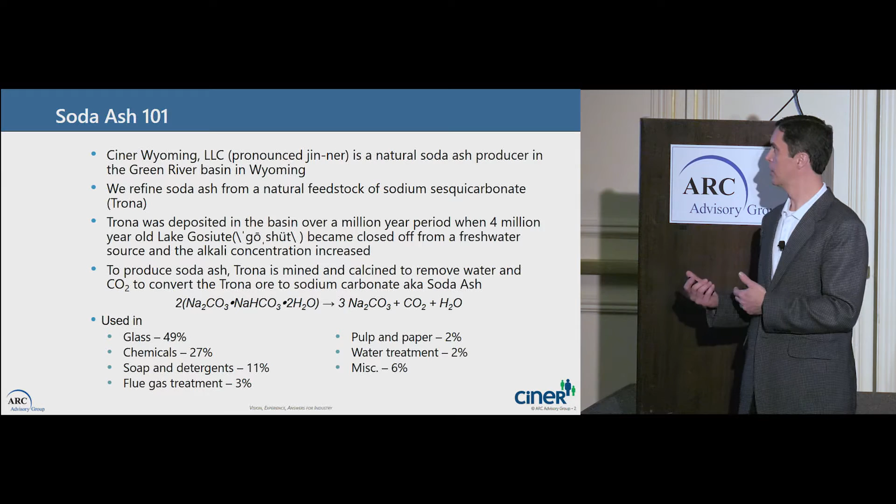There was a lake. There was some volcanic activity that put a lot of sodium in the area. There was some natural carbon decay, and over time the lake evaporated, and so the largest basin of trona in the world is right here in Green River, Wyoming. Us and 3 of our competitors produce about 20% of the world's soda ash production based out of Green River. It's mined, it's calcined, we liquefy it, we remove impurities, we convert it to Na2CO3, which is soda ash, and that's put on rail cars and we ship it around the world.

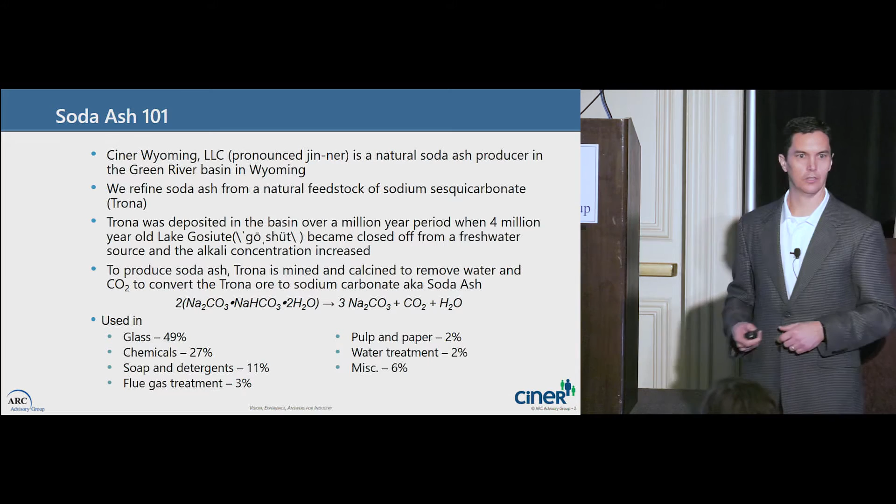As far as uses of it, about half of it goes into glass, chemicals, soaps and detergents, so baking soda, Arm & Hammer, things of that nature. So that's how it's used.

So let me tell you a little more about our journey. We started last spring, really, and Jolene's our smart plant lead, and she was using some OSIsoft plant intelligence and starting to get some interest in the company of what we could do with this historical data. And we learned a lot. My first expectation was we could use this data to predict maintenance on our equipment and try to reduce unplanned downtime. That's certainly a value, but as we looked at it, we saw lots of other areas that we could drive value from the smart plant, including process optimization.

Being at a mine, safety is a major concern, so mapping safety data onto our plant to provide visibility of that information, environmental data collection, quality. There were lots of different things, dashboards and executive dashboards. So we came up with 5 areas last spring that we wanted to prove out that we could deliver value. And over the course of a couple months, we started demonstrating that there was value here, and it was theoretical value at that point.

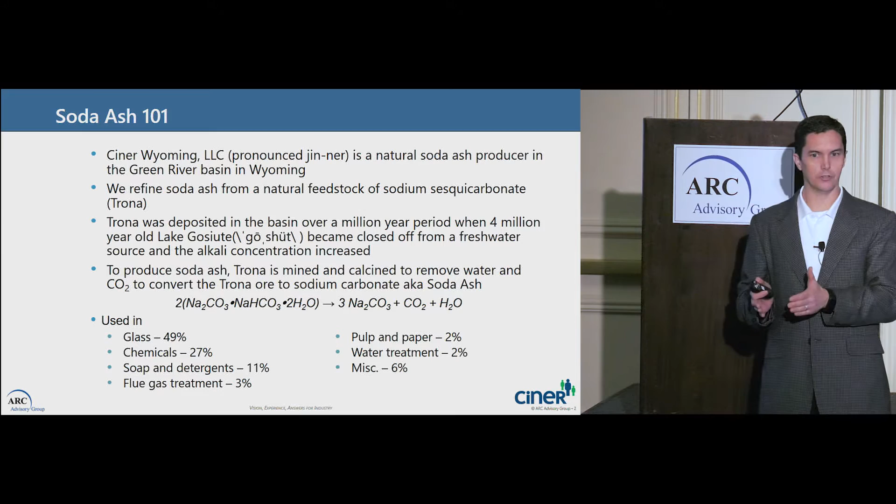So we come into last fall, about the October timeframe, and we said we want to get deeper into both the process optimization and the predictive maintenance, and we need to bring in some partners to help us with decision science and machine learning. So we placed 2 small bets on those.

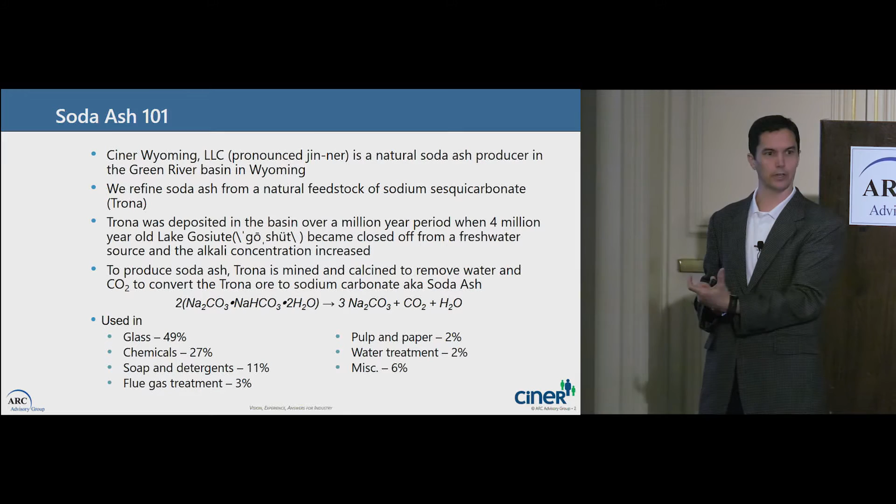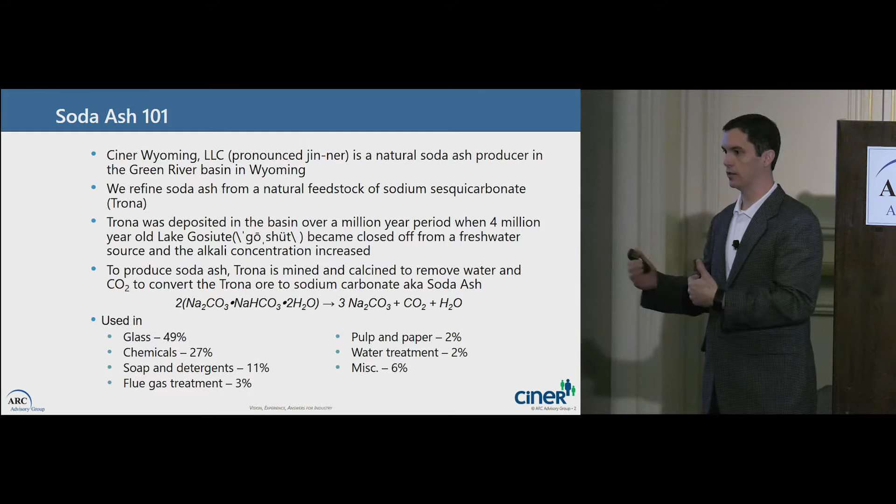One was with partners Microsoft and OSIsoft and a third-party data scientist company, and we were going to pair them with a continuous improvement group in our company that was doing a design of experiments on one particular part of our plant, and figure out, with data, could we learn more about that process than we were doing just with our design of experiments, which is taking a lot of time and a lot of effort.

The second bet was with the company Falkonry, and Jolene's going to talk about that more in detail, using the decision science built into the software where we could tie our operators more tightly to the pattern recognition and the decision science, and we got to a much faster result with that one.

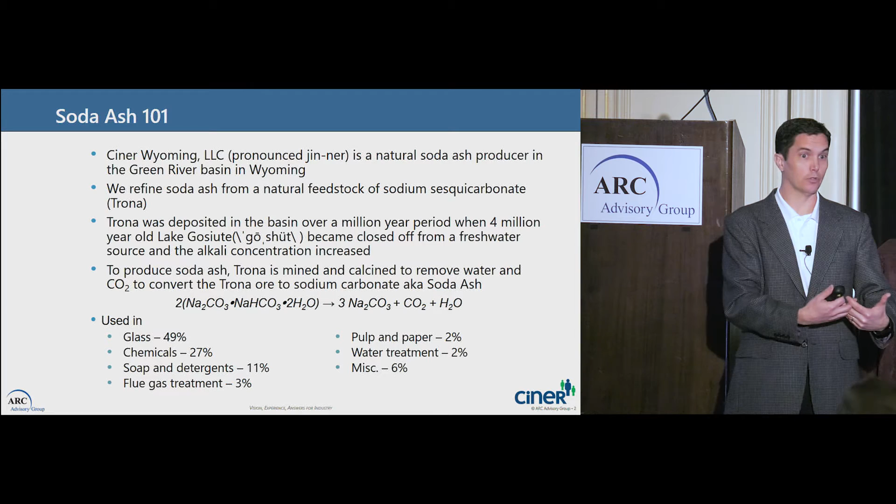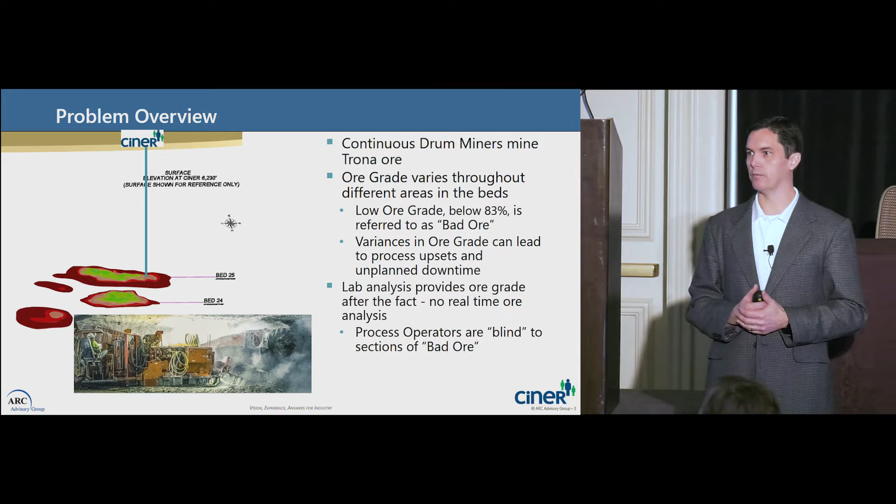So let me give you a bit of the problem overview. So we mine trona about 850 to 900 feet below the ground. We have these continuous miners, electric powered vehicles down in the mine that are constantly chewing up the trona ore, putting that on belts, sending it miles underground, up a hoist, and then we start it down a refining process.

One of the challenges is with ore grade. So as we're mining different parts of the seam, there's different ore grades and different insolubles, different shale, different rock, different components. So we measure bad ore as anything 83% or below. So that 83%, 85%, 90% is the pure trona capacity, and the rest of that is insolubles. It could be water, it could be impurities, it could be shale, something else.

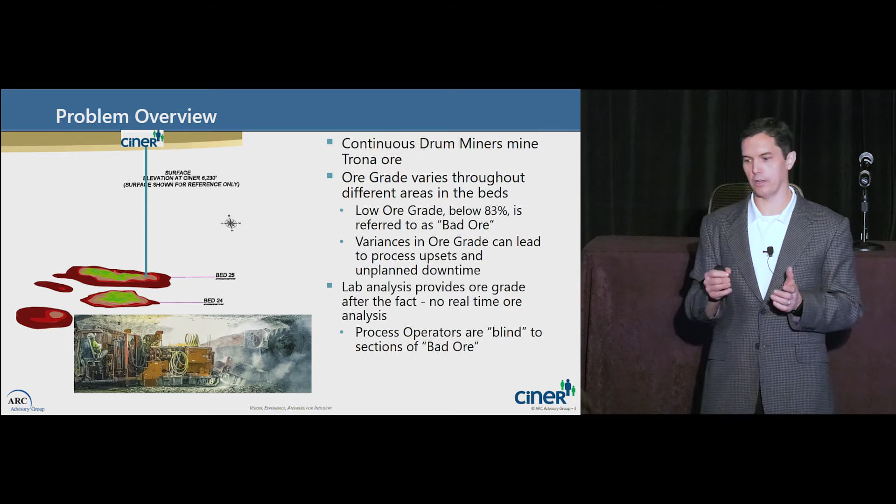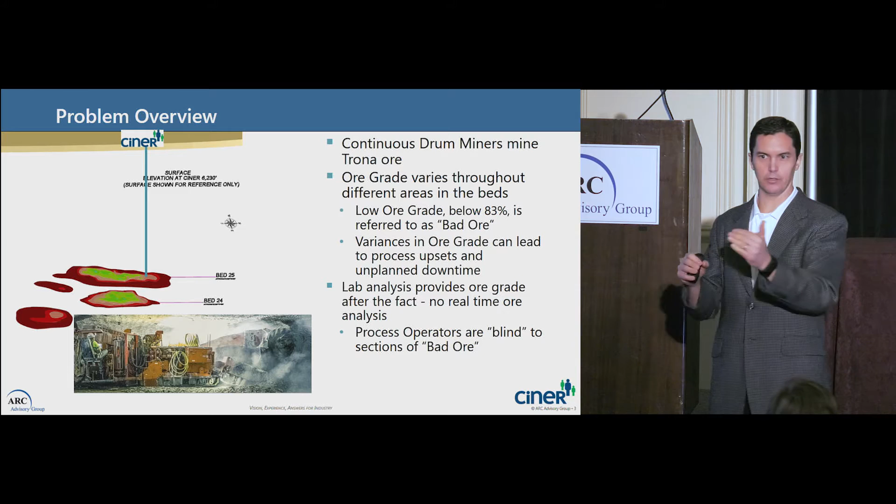Well, we do have a lab that analyzes it, and they do it twice a day, but we get the results the next day. So the problem is our operators are blind, and if I take a step back to last April, we did a maintenance and we changed out the filters at the beginning of this process. And before we changed that, we actually had some visibility to the opacity or the ore grade changes as it came into the process. We changed out that filter, and all of a sudden that visibility, that signal for our operators to know bad ore is coming in, went away.

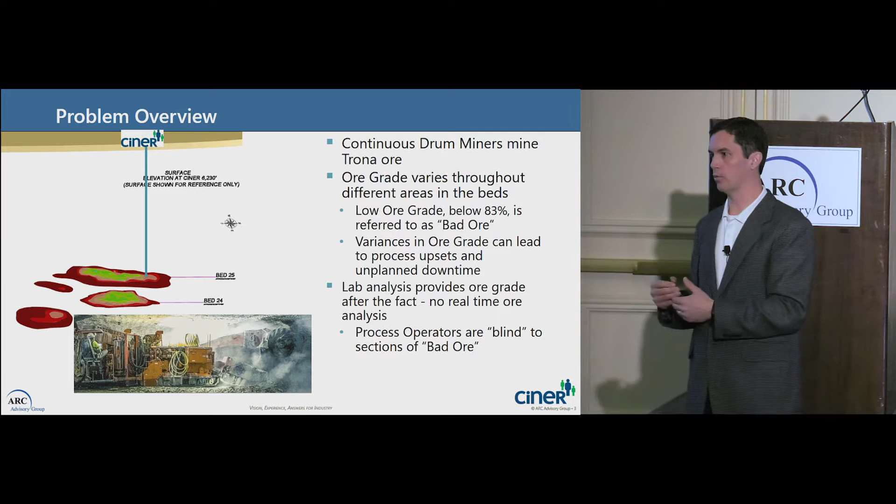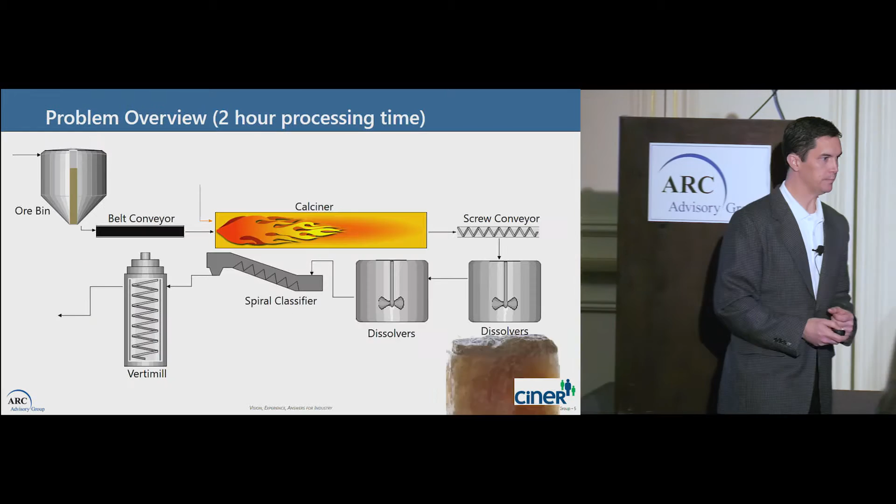And so the last few months we've been struggling with more unplanned downtime, because this particular piece of equipment, this Vertimill, was plugging up with insolubles and we had no visibility. So we started looking at, oops, let me go back here. We started looking at how can we give visibility to the operators on what impurities are coming, on the changes in ore grade, on what types of insolubles are in there, because it may be a certain ore grade, but the insolubles are harder and they take longer time to chew up, or they're a softer type of rock and they chew up much faster.

So we needed to give visibility of the ore grade to the operators real time so they can make decisions on that. The Vertimill then can be overloaded if the insoluble is too high, if the PSD, the particle size distribution, is too big, and these 2-inch metal balls that grind up that insoluble get spaced too far apart. They can't do the grinding that they need.

Or inadequate loading. We go through a 5-gallon bucket a month of these metal media balls, and so right now unless we've stopped the plant and are looking in there, there's no visibility to how many are in there. So we needed to give visibility to the operators of when is it time to reload and make sure they don't overload with too much media.

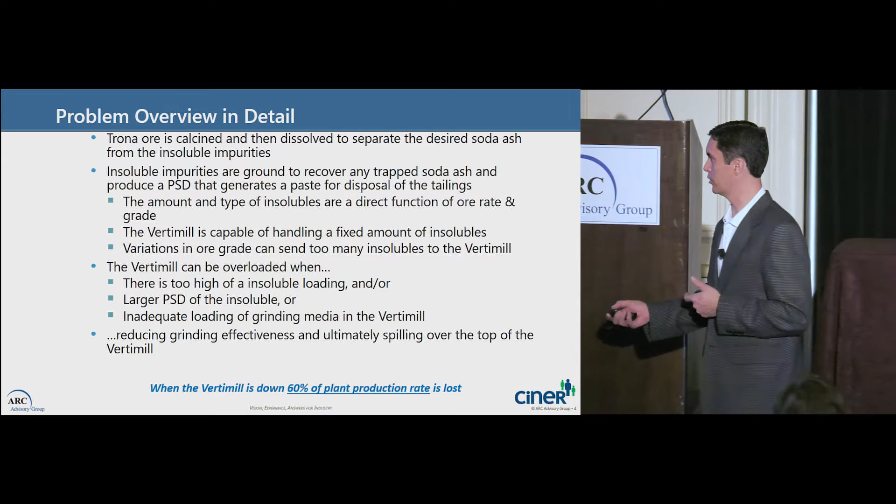But the key problem, and as I talk about our journey and hand over to Jolene, is really driving with a vision of where we want to go, with identifying a business value that we're trying to achieve, and then by making small bets and learning and then going into operationalizing that. But this particular problem, when this Vertimill is down, 60% of our production rate is lost. And that can be lost for 4 to 24 hours, depending on how bad the upset condition is and how much recovery time we need.

So the other part of our plant that produces 40%, it was designed to handle a lower ore grade capacity, has no issues with ore grade changes. This particular Vertimill was designed for a 90% ore grade. So if we slipped into the high 80% ore grade, we started seeing problems. To go replace this piece of equipment, minimum 1.5 to 2 years away, significant capital investment.

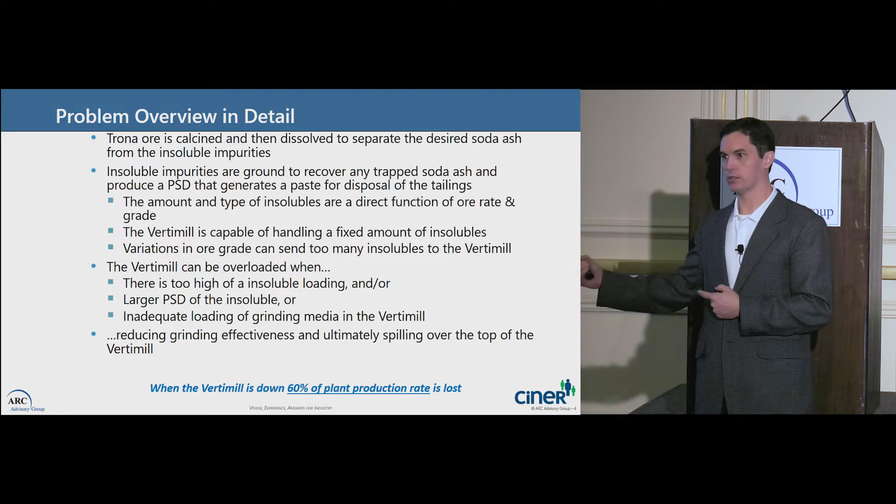So we may go down that path, but what we're trying to do now with machine learning and with data and analytics is let's solve it. Let's make sure we can flow the optimal rate of production through this system using the existing equipment we have. So I'm going to hand it over to Jolene to talk through the details of the process and the machine learning that we did.

So I hope you can all hear me, correct? All right. I apologize in advance. I love to talk about this subject. It's absolutely my favorite thing to talk about. But my thoughts are everywhere, and so I can be really scattered. So I have notes, and I may pause a lot.

Anyway, so I'm the smart plant lead over at Ciner, and I started playing with the PI system about 3 years ago, so OSIsoft archived data, and looked at a lot of trends and a lot of signals, and was really interested in this predictive type of condition-based maintenance, predictive analytics. And you can struggle with that, and you can really burn your eyes out on trends and what you're trying to find in simple analytics.

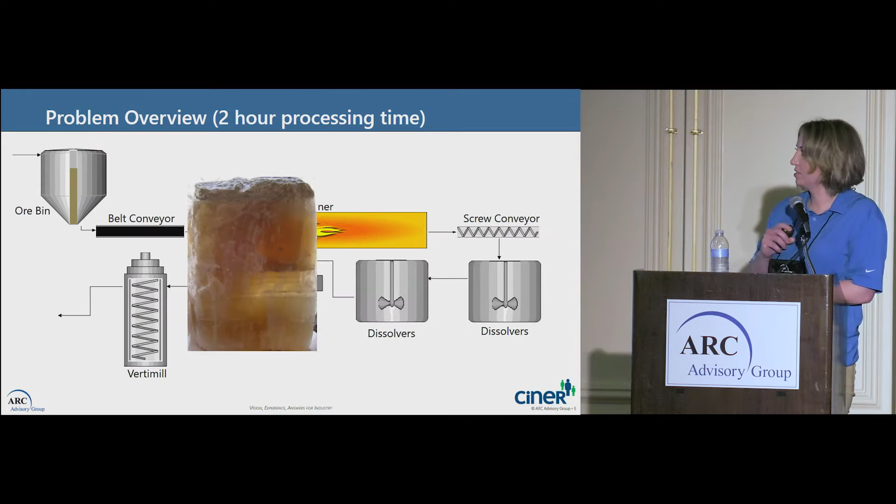But first I want to tell you a little bit about our process, and then I'll get into our pattern recognition. So this is our process. We mine the ore, we take it to an ore bin, we then convey it over to a calciner, and the calciner is actually where we heat it up and we turn it into soda ash at this point.

We then take that product from the calciner and put it into the dissolvers, where we make a kind of saturated liquor that's actually our final product in liquid form. From there, we have to remove the impurities and insolubles, so we just do a simple solids-liquid separation. And those solids are mechanically conveyed using this spiral classifier over to the Vertimill.

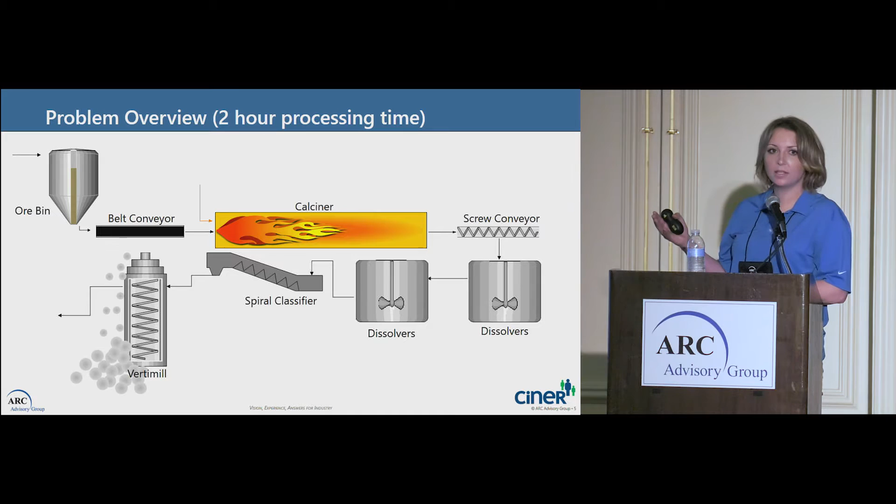Once they get into the Vertimill, they have to be ground. We grind this product so we can actually recover any trapped soda ash inside the insolubles. In the Vertimill, if the balls are able to contact each other, then the balls will move up the center of it, grind the material, come around the sides, and fill the voids in the center, and you've got this circular motion.

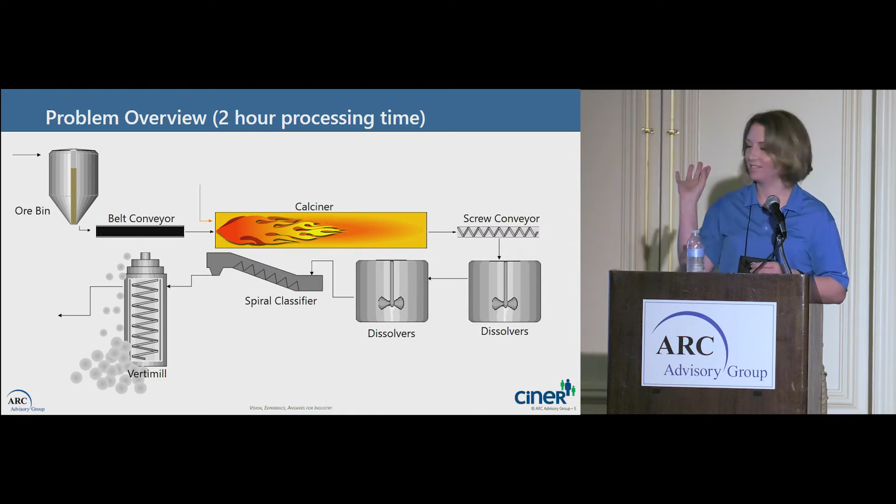If the balls are unable to contact each other, and it kind of turns like fruit in Jell-O, the screw conveyor will take all that material up and just spit it out the top. So it's not a fun thing to clean up, as you might imagine.

So to tackle this problem, what we decided to do is talk to the operators, and we wanted to see what they were looking at and what they would use for overload conditions. They were identifying signals that were happening directly on or around the Vertimill. So they essentially didn't have a warning, they just reacted to events that were happening right now.

And with the Vertimill, you don't have a lot of time to react if you're reacting right when it's upset. We wanted to give them some sort of warning so they could prevent this downtime. And we wanted it to be a minimum of 75% accurate. Because you can run these conventional analytics and see a lot of different alarms, and you test them and they don't cut it. So we wanted it at least 75% accurate so they would depend on it when they needed to.

We identified the 10 data streams or patterns that would potentially give us a good reading on when bad ore was coming. The problem with these patterns is the magnitude, the frequency and the consistency wasn't there. So with our conventional analytics method, we couldn't produce an effective or reliable warning. And that's when we realized we needed to find a different approach. That was months and months of staring at trends and running any sort of analytic we could think of.

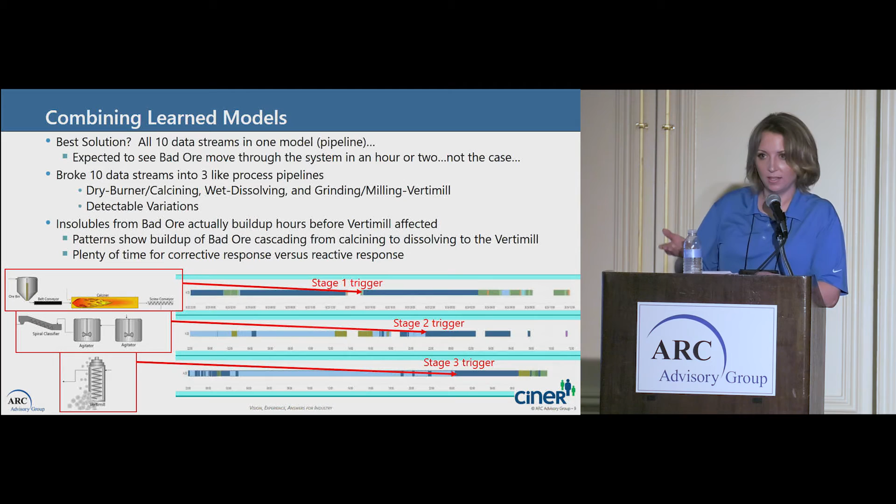So we were really surprised and excited that now we could give our operators an indication how to run the unit. Instead of just cutting back because they think they're gonna fail, they can not cut back so much. It's not affecting the Vertimill yet. You know, we can maximize how we run this unit.

Let's see. I believe we're back up to Scott. He's going to discuss our operation. Yeah, that right there.

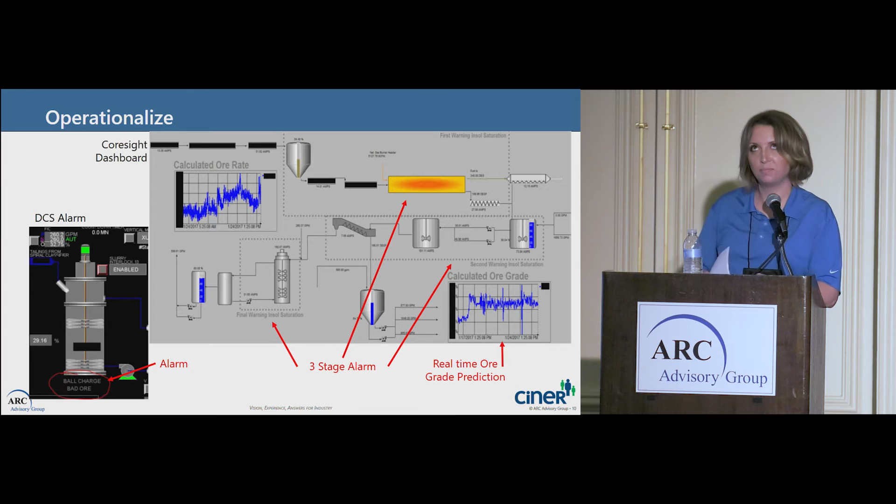Thank you, Jolene. No problem. Am I back on?

So we went through figuring out this pattern. Now we've got this data in a PI system. But talking to the surface manager, that's not good enough. He sees value here, but until I can get it back into the operator's hands, there's not value. Value potential, not value.

So let me talk for a minute about our operators. Our operators are tremendously smart. Many of them have run this plant for 20, 30, 40 years, have a ton of expertise up here. Some of them can walk out on the plant floor and by sound, pick up something. It's kind of like a mother in a large crowded room, she can hear her baby crying over in the corner, right? By sound, they can detect something's wrong with this plant, I need to go make a change.

But the interesting thing is when we bring those operators together and they bring their expertise, that expertise doesn't always agree. This person has, hey, when I see this condition, I run it this way. The next person has a different opinion on how to run it. So what we are trying to do, number one, is take that expertise out of their head and give them some information that they can make better informed decisions on, standardize those decisions, and so with the expertise and with data, get to a better, more consistent result.

So back to the problem. So we have our 3-stage alarm. The first warning up here of insol saturation, second warning, third warning. So we work with our partners OSIsoft to figure out, I've got this data in PI, I've got a trigger, how do I get that information back into my DCS so my operators watching the process can know about it right away and can take action.

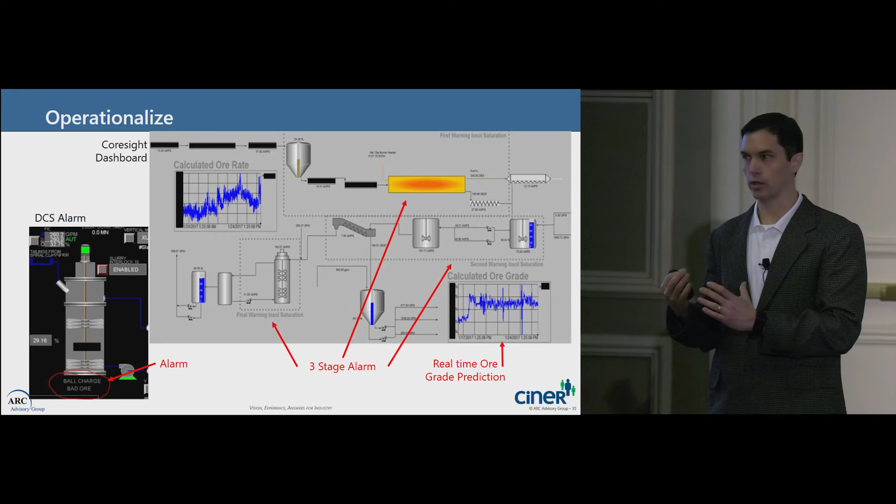And then we're already starting to backlog and prioritize what are the next processes that we want to analyze, what are the next machinery that we want to look at in terms of predictive maintenance. And basically build a factory of how do we roll these in, how do we set these alarms, and how would you go forward.

One other challenge we have is these DCS alarms. Our control room operators, 3 or 4 operators, they get 4,000 to 5,000 alarms in a week. So a ton of nuisance alarms, 80 to 90% of those are not valuable. They're single point pressure, single point temperature, not valuable in itself.

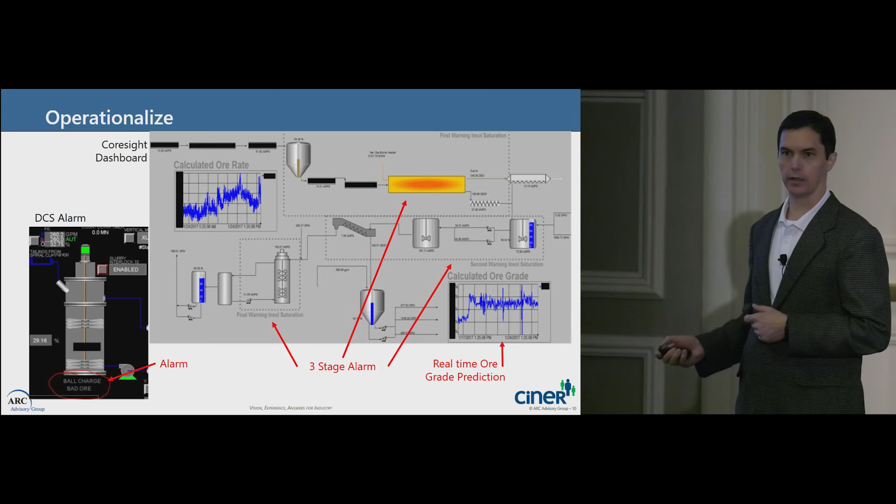So we've agreed with operations that we're going to do our alarms and our analytics in PI. We're going to pass those triggers back in. Then they can come and get more contextual information about that alarm. But there's a process of how do we eliminate those nuisance alarms and get those out of the way, because today there could be a valid alarm and it's ignored because it's a needle in the haystack.

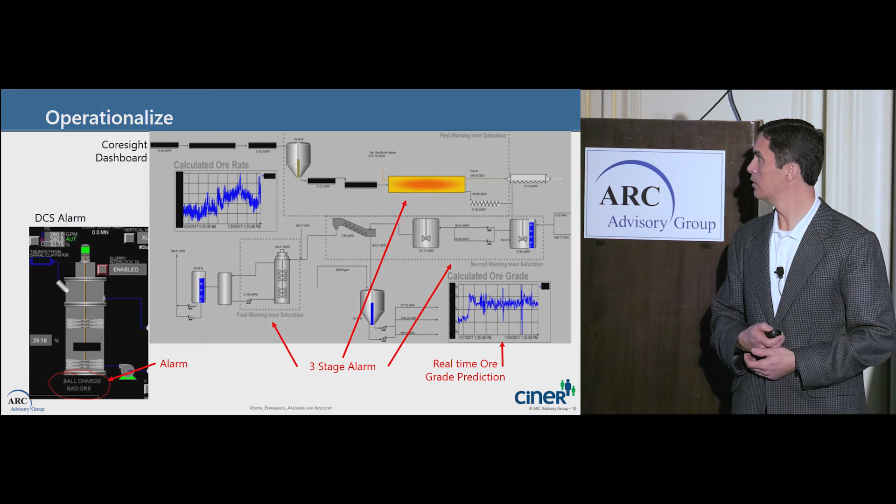Go forward. Move the slide forward. There we go.

Benefits. From an operations perspective, we've talked about this. Give the operators alarm visibility in their system and their DCS screens they're looking at today. So this person's looking at unit 4, he can be seeing his screen. This person's looking at a different part of the process, he can be looking at his alarms. And give them confidence to make the right decisions regarding the optimal flow rate.

So before this alarm, what's happening, as I mentioned, they lost visibility to the ore grade changes. They may have waited too long, and all of a sudden we're in an upset condition when they realize it, and then we have 4 to 24 hours of downtime, right? Or they were worried about that, they ramped the flow rate down and ran it in a degraded state longer than it needed to because their shift's over in 6 hours or 12 hours. They didn't want any issues to happen while they were on, so they're going to run it 40, 50% slower, right?

By giving them this information, we can give them confidence to make the decision: bad ore coming in, cut the rate back 10%, cut the rate back 20%, watch it as those insolubles get ground up, and tell them when to hit the gas pedal again and pull that tonnage rate up. Business benefits, that's important. I didn't mention before, but we sell at capacity. So when we have unplanned downtime, that's dollars that our cash register is not ringing. And so we want to eliminate and minimize that. And so the benefits are measurable and significant.